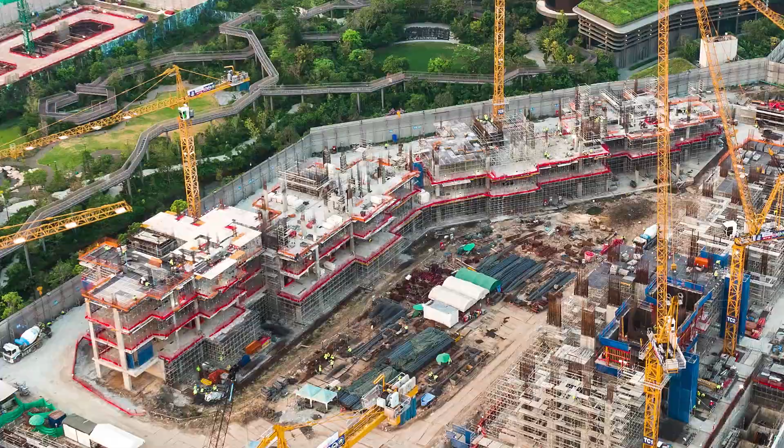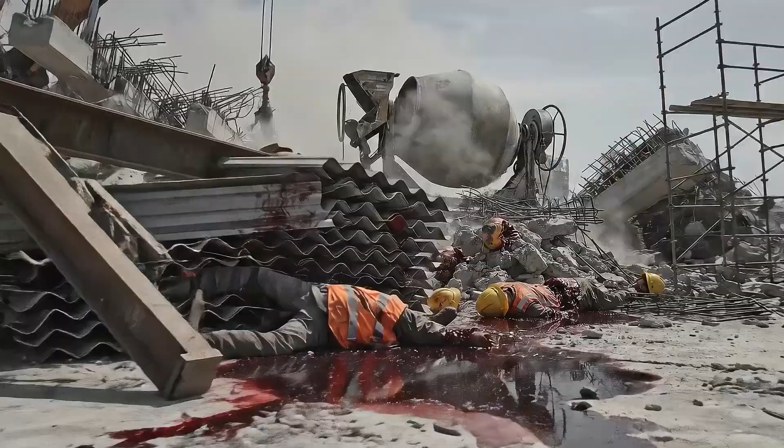Among the many hazards that occur on construction sites, collapse and burial accidents are types of incidents that can lead to massive damage in a very short span of time. During the process where various structures, such as ground, shoring, scaffolding, or formwork, suddenly give way, workers often become trapped by earth or construction materials. And if rescue operations are significantly delayed, their very lives are then gravely threatened.

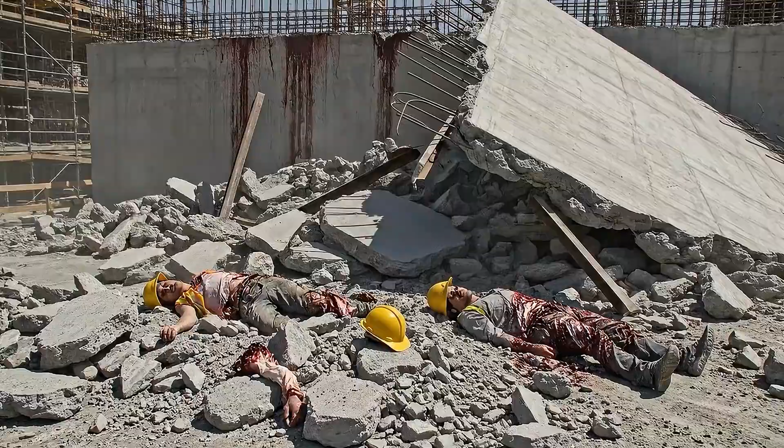Due to these characteristics, collapse and burial accidents have a high mortality rate and severe after effects, so they are classified as areas that must be proactively managed on site. The learning content of this lecture is the prevention of collapse and burial accidents at construction sites. We will practically approach how accidents start from certain factors, what structural and operational risks are repeated, and how to control them on site. The learning objectives of this lecture are as follows.

First, it is to clearly understand the causes and main types of collapse and burial accidents. Secondly, it is about reaching a level where you can explain the necessary safety management procedures and emergency response plans to prevent accidents. Through this lecture, you will be able to understand collapse and burial accidents as complex disasters caused by the interaction of ground and structural work methods, rather than just simple structural damage.

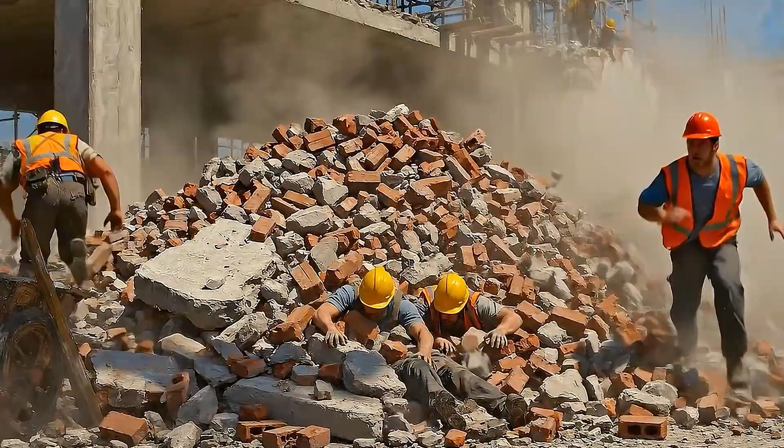Collapse and burial accidents occurring at construction sites are complex disasters, typically resulting from various risk factors acting simultaneously. First, let's examine collapse. It refers to the phenomenon where structures such as buildings, retaining walls, scaffolding, or even the ground itself are unable to withstand their own weight or maintain their structural integrity due to external forces, ultimately leading to their complete collapse. Here, external forces refer to not only natural factors like heavy rain or earthquakes, but also vehicle vibrations, heavy equipment loads such as excavators or cranes, and excavation work at adjacent sites.

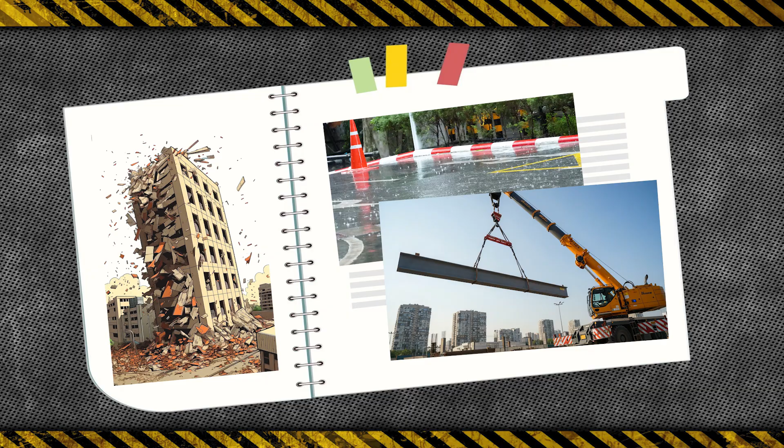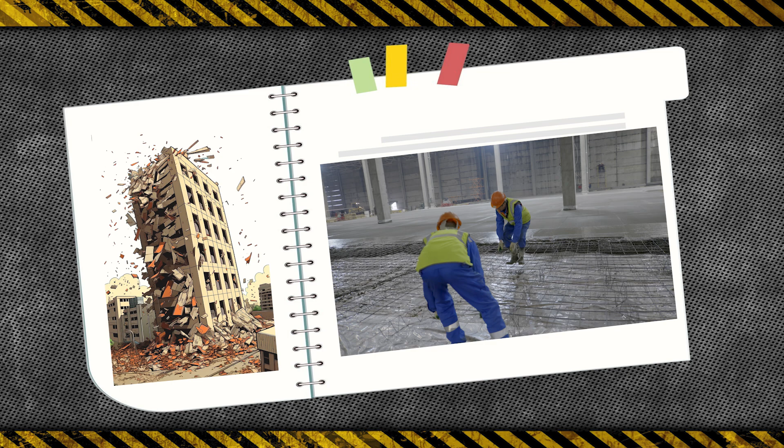Poor construction is a major cause, as structures can easily collapse if they lack strength, or if connections and supports are improperly installed during the building process. Such collapses don't only occur during construction, they can also happen long after completion due to ground shifts or additional loads. Entrapment refers to a situation where workers or equipment are covered by soil or structures due to a collapse.

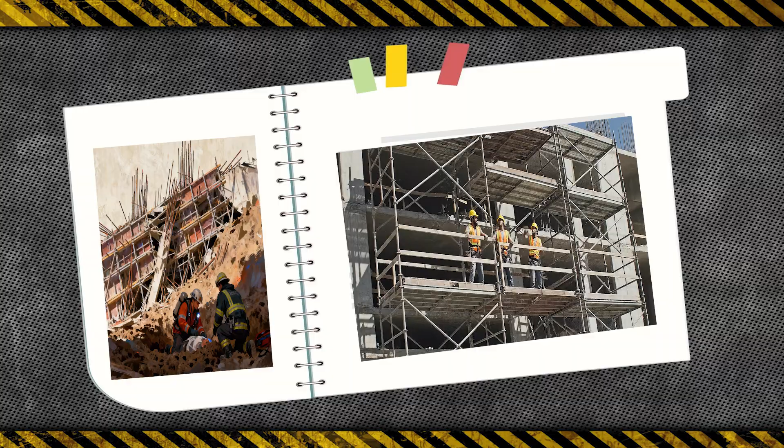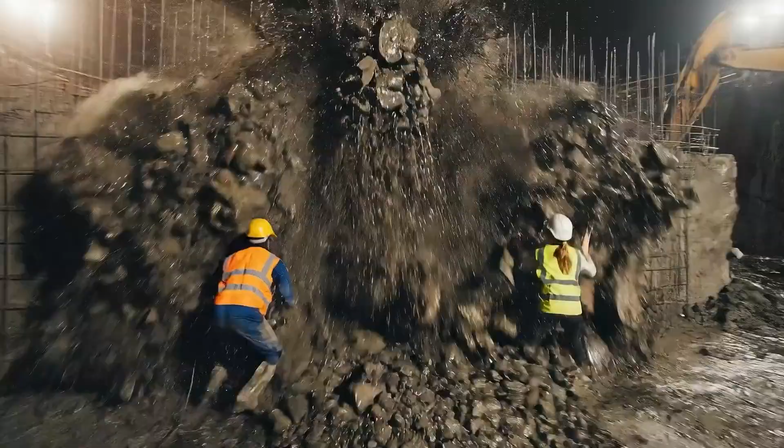Typical examples include workers being buried under a pile of soil as the ground collapses, or workers on a lower floor being crushed by structures as scaffolding collapses. Especially during excavation, tunnel construction, or underground structural work, if the earth-retaining structure weakens even slightly, soil can instantly pour out, leading to a high risk of accidents.

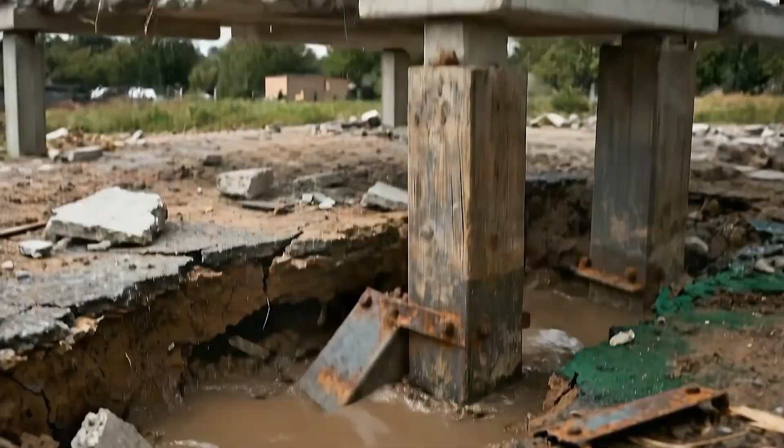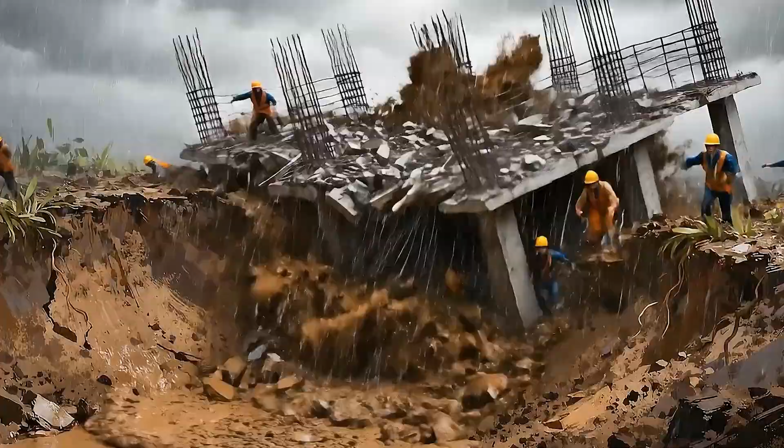The causes of such accidents are relatively clear. If excavation proceeds when the ground is weak, or if there are buried objects within the ground preventing sufficient support, the risk of collapse significantly increases. When groundwater seeps in due to improper drainage, or when soil moisture increases during heavy rain, the ground becomes heavy and loses its supporting strength.

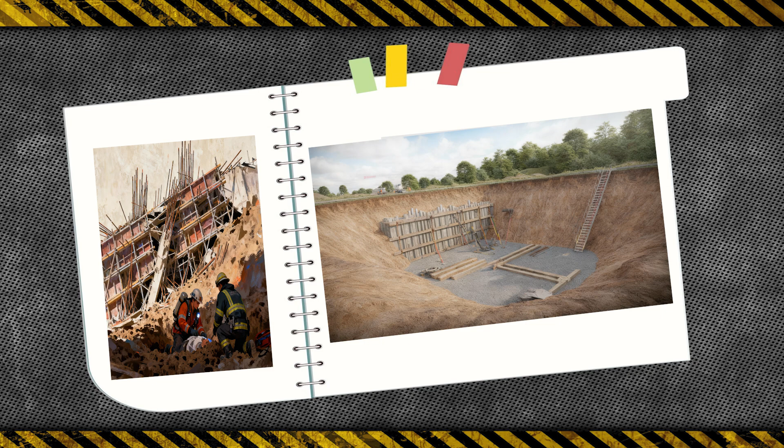Another major cause is when retaining walls, shoring, or supports do not meet design standards or are poorly installed. Improper excavation, like digging wider than planned or undermining, destabilizes the ground, easily leading to collapse. If management procedures such as risk assessment, TBMs, or site inspections are missed, the likelihood of an accident increases further.

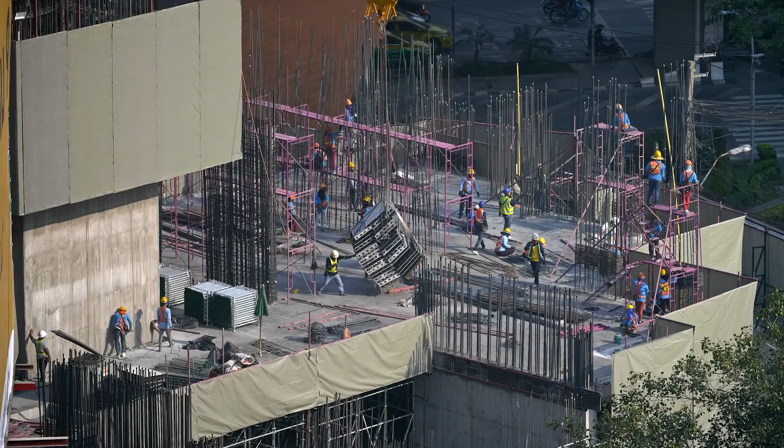Construction sites are structurally fast-changing and unpredictable environments. Especially in confined spaces or deep excavation sections, changes in the ground must be meticulously tracked, and instability significantly increases when external factors, such as the load of adjacent structures or groundwater flow, act simultaneously. There are many cases where manpower and equipment are simultaneously deployed here, increasing the risk of initial collapse leading to secondary accidents.

According to statistics from the Ministry of Employment and Labor, collapses and burials account for about 20% of fatal accidents in the construction industry, indicating a significant proportion. Many cases have seen the Serious Accidents Punishment Act applied. When these accidents occur, both fatality rates and injury severity are high, making this a disaster type that must be prioritized and managed on-site.

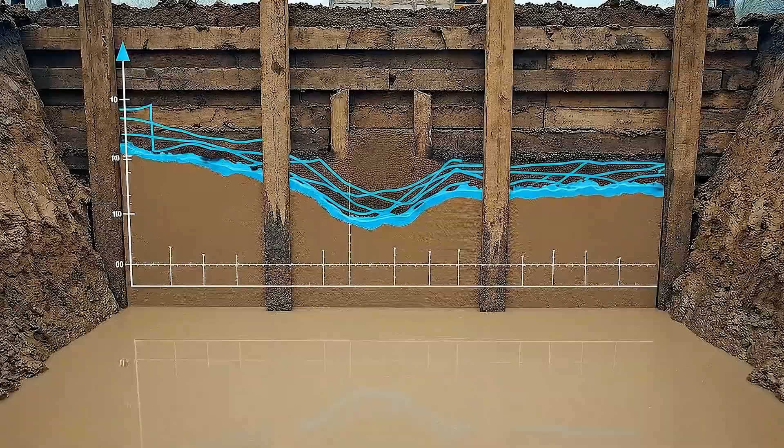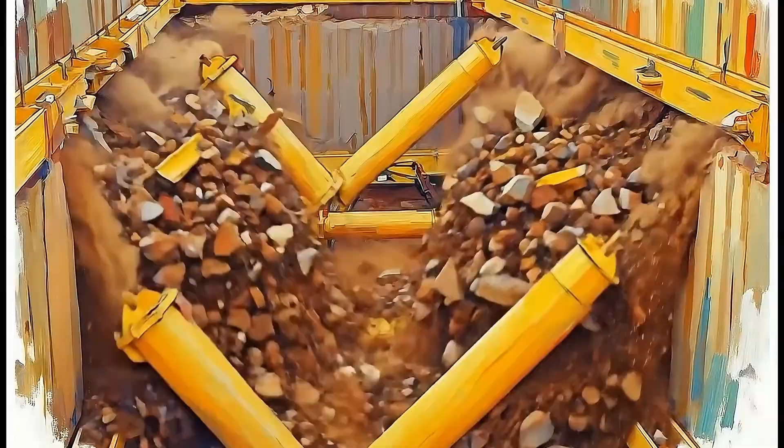Collapse and burial accidents usually happen when the ground or temporary support structures cannot withstand the forces they are meant to bear. If the ground is weak or groundwater flows in, the soil may not be able to maintain its shape on its own and can collapse rapidly. Additionally, if the retaining wall or support structures are not installed according to design standards or are not properly inspected after installation, the excavation face can easily collapse.

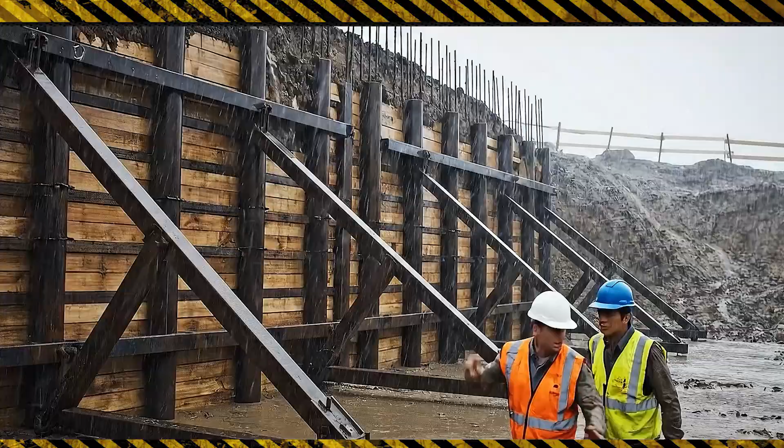During periods when soil moisture rapidly increases, such as heavy rainfall or thawing seasons, the ground suddenly weakens, increasing the risk of accidents. And at sites where basic safety management, such as risk assessment or toolbox meetings, is not implemented, even small signs can lead to collapse due to inadequate response. The load of adjacent structures, repeated loads from heavy equipment like excavators or cranes, and external forces such as earthquakes or vibrations can push earth pressure past its limit, causing structures to collapse.

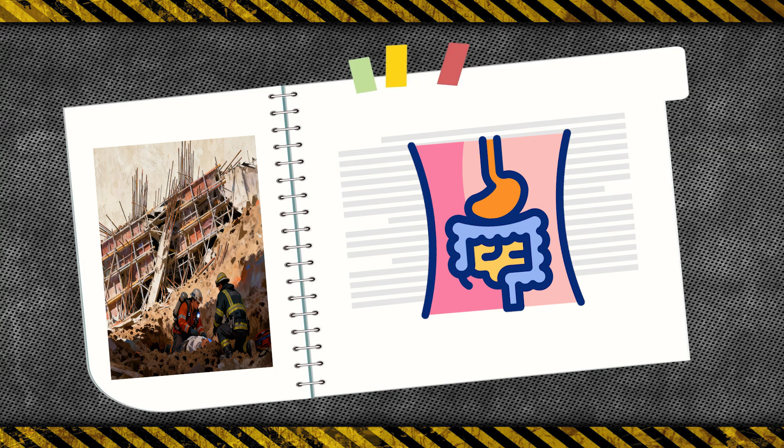When such collapse and burial accidents occur, the physical harm suffered by workers is extremely fatal. In a situation where the whole body is pressed by earth and sand, a pressure close to 1.5 tons instantly compresses the chest and abdomen, causing the organs to be crushed and ribs to break in succession, making it difficult to breathe immediately as the lungs cannot expand. Often, the internal organs are pushed or squeezed to one side, leading to loss of consciousness and collapsing on the spot.

Arms or legs are often hit by soil and concrete fragments, bending abnormally, and frequently suffer comminuted fractures where bones shatter. In these situations, muscles, blood vessels, and nerves are simultaneously severed, leading to immediate bleeding. If emergency response is delayed, it becomes a life-threatening condition.

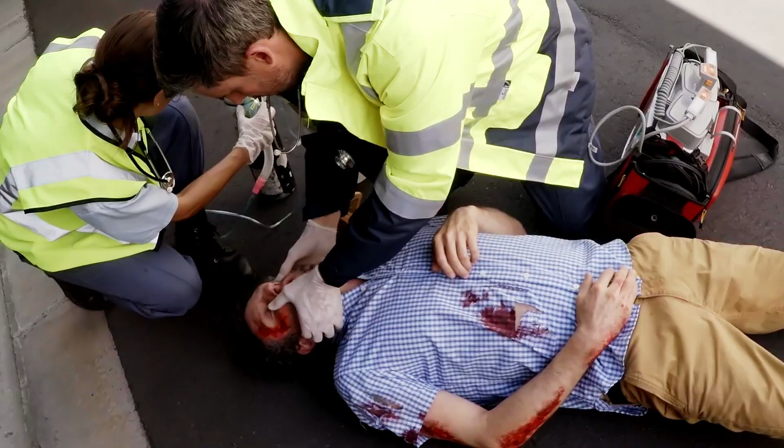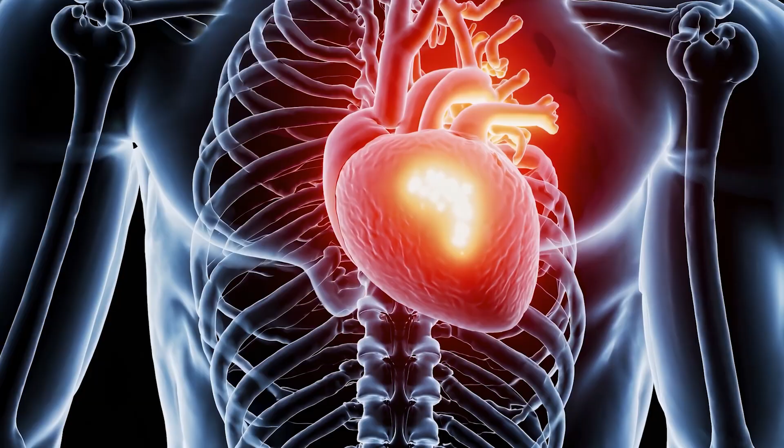Compression asphyxia, where the chest is compressed and the lungs cannot function, is also a very common injury. Within seconds, one may experience shortness of breath and chest pain, and if breathing stops, the heart can immediately cease to function. Even if only the lower body is buried, severe issues can arise.

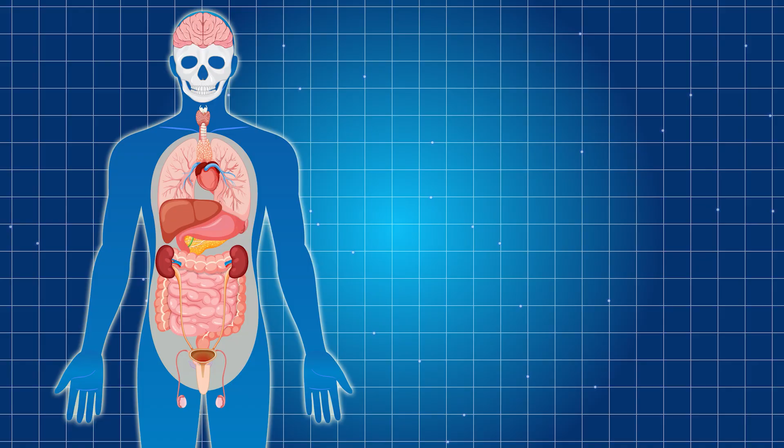If compression is prolonged, blood flow is blocked, and toxic substances rapidly accumulate in the tissues. After rescue, when the compression is released, these substances enter the bloodstream all at once, causing acute kidney failure. Even if they appear conscious, it's a very dangerous state where organ damage has already progressed.

When falling objects and soil pressure act together, the head and neck suffer fatal damage. Skull fractures or brain hemorrhages occur instantly, and if the cervical spine is damaged, the nervous system is instantly paralyzed. Breathing becomes impossible. Within confined or buried spaces, physiological changes manifest with alarming speed.

As oxygen levels become critically low, individuals may experience severe headaches, confusion, and even seizures. Furthermore, inhaling soil and debris can obstruct the respiratory passages, potentially leading to additional and fatal asphyxiation. The body's core temperature also plummets rapidly, very often resulting in life-threatening hypothermic shock. The longer the rescue is delayed, the lower the chances of survival.

If rescued within 5 minutes of being buried, the chances of survival are high. But after 15 minutes, severe hypoxia begins. And after 30 minutes, the mortality rate increases sharply. Because surviving for over an hour is very rare, in collapse and burial accidents, the speed of initial response is paramount.

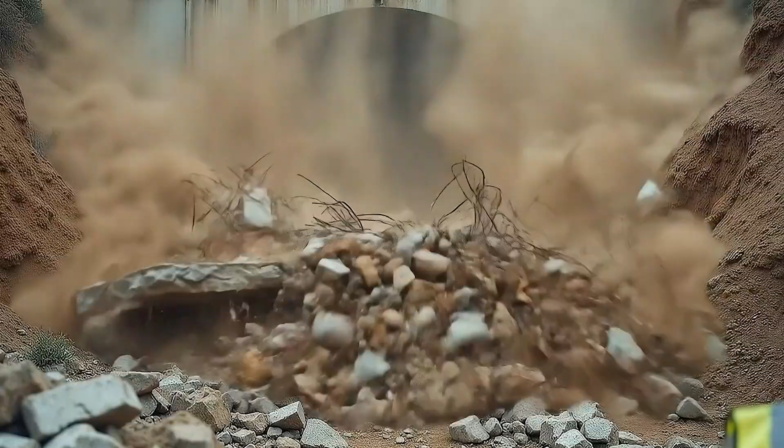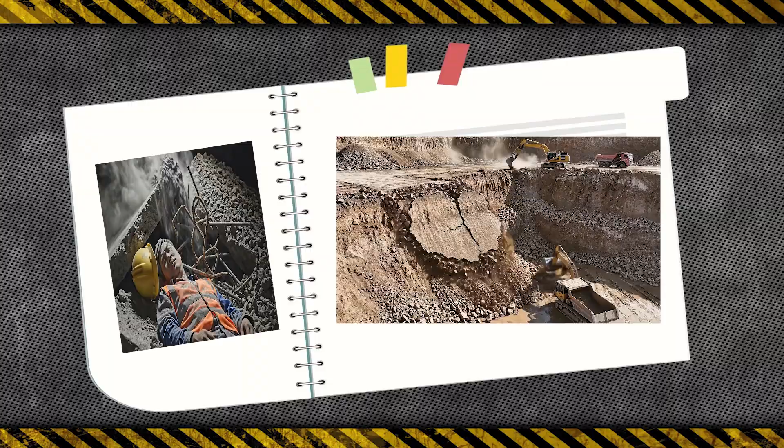This time, we will continue to look at actual collapse and burial accident cases that occurred at construction sites. This is because only by specifically understanding what situations are repeated on site can preventive measures be accurately applied. The first case is a soil collapse accident that occurred during excavation work.

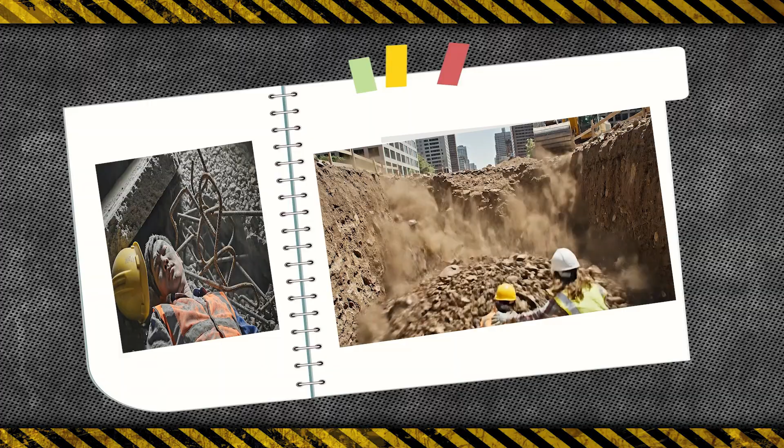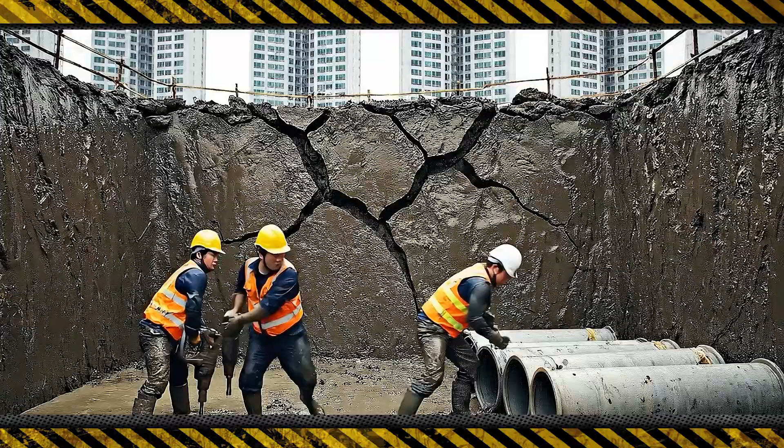In the middle of a city, while excavating to a depth of about 4 meters, the sidewall soil collapsed, quickly burying 2 workers. Excavation at this site proceeded without conducting a ground survey, and necessary earth retention or support structures were not installed for excavations exceeding 2 meters. Drainage facilities were not adequately set up, so after heavy rains, the ground was saturated and the safe slope of the excavation surface was insufficient.

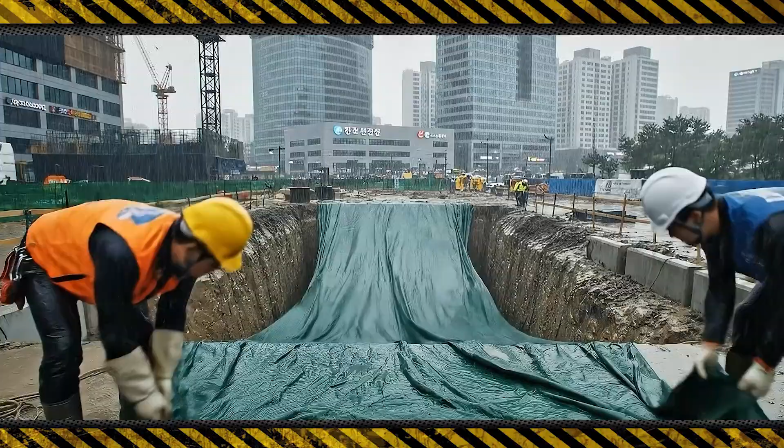Risk assessment and drilling investigations were omitted before excavation, and with no on-site supervision, immediate action was impossible. This accident could have been entirely prevented if the ground conditions had been surveyed and support structure plans and drainage measures prepared before excavation. If there are just procedures like stopping work when there is a rain forecast, covering the excavation face with a waterproof sheet, and sharing the risks through TBM the day before the work starts, the possibility of an accident is greatly reduced.

Next, the second case is a collapse in an underpass after heavy rains. Immediately after the monsoon, a retaining wall in the underpass tunnel section overturned, and the earth support collapsed, damaging nearby structures and burying equipment. At the time of the accident, the drain was blocked, so rainwater kept entering behind the earth retention wall. Soil pressure rapidly increased, and the structure couldn't withstand it.

Despite this, drainage inspections were not carried out, and necessary safety procedures during construction were repeatedly omitted. Drainage facility management was inadequate, and emergency measures for weather forecasts were not prepared. There was no procedure to check ground stability after rainfall. For prevention, it's essential to inspect drains and sumps before and after heavy rainfall and remove debris.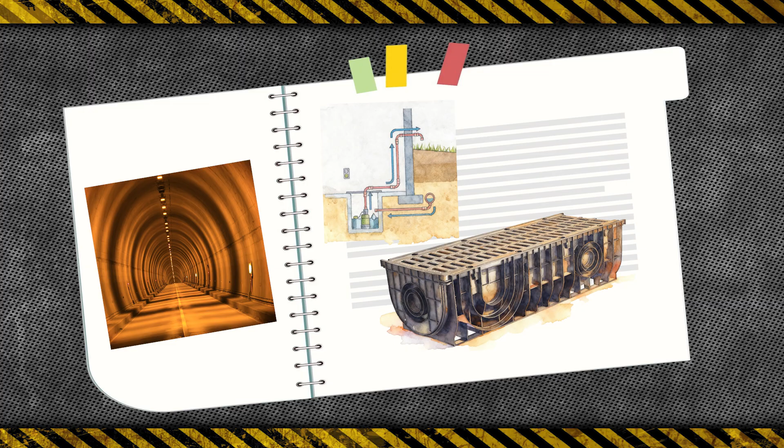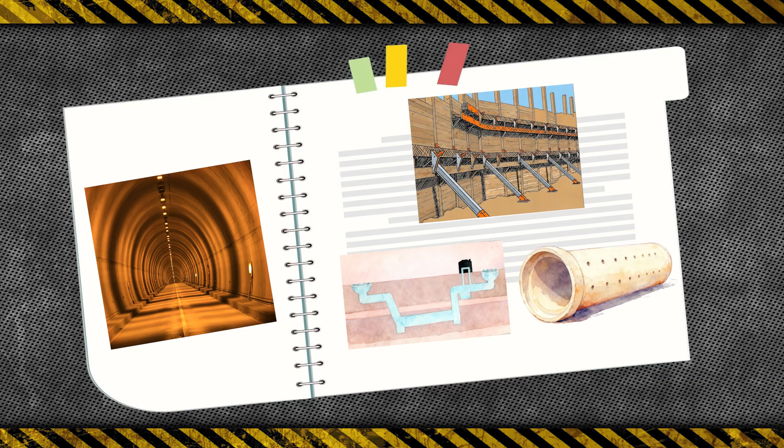Additionally, measures are needed to install drainage layers and perforated pipes behind retaining walls to disperse water flow. After rainfall, ground stability must be re-evaluated and the need for further reinforcement assessed. Also, we must operate a system that checks weather information in real time and can immediately stop work if danger is detected.

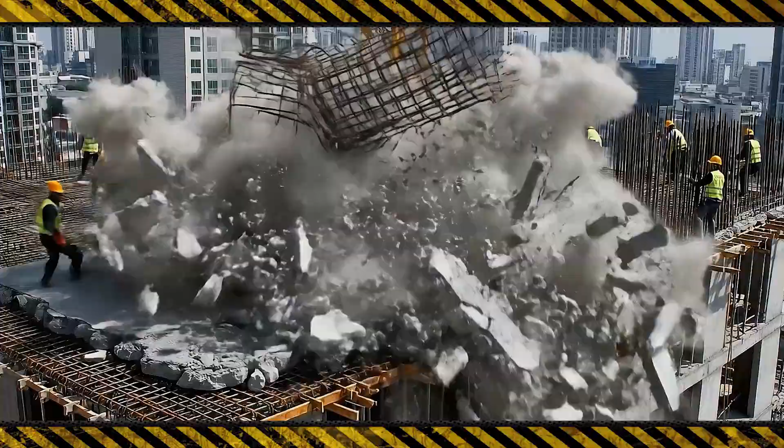These two examples clearly show the key areas where collapse and burial accidents repeatedly occur, such as excavation, drainage management, and earth retention structures. This can be seen as a prime example that demonstrates the consequences when safety management procedures are omitted or inspections are inadequate. To prevent collapse and burial accidents, it is most important for supervisors and workers to accurately understand and perform their respective roles.

First, we'll take a look at the responsibilities of the supervisor. The supervisor must check and record the safety checklist every day before starting work and ensure that actual risk factors are properly reflected in the work plan. It's crucial to verify if reinforcement measures were properly implemented based on the risk assessment. Ground conditions, drainage, and temporary support installation must all be checked through visual inspection and measurement.

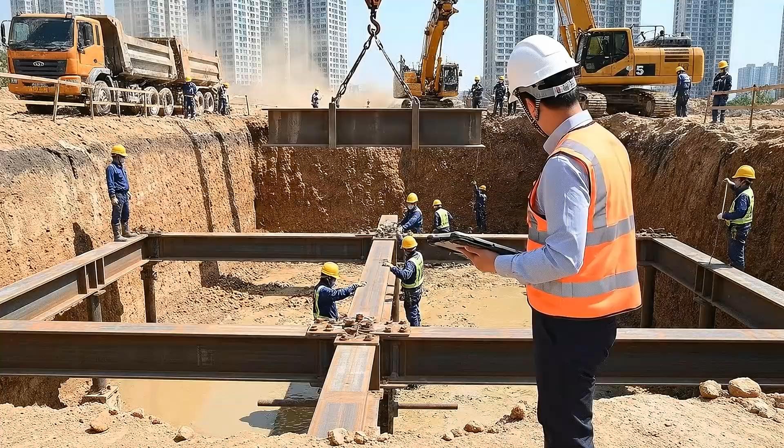Given that supervisors also possess the authority to halt or resume operations based on changing weather, an emergency inspection plan must be established beforehand when heavy rain or strong winds are predicted. You must personally oversee the installation, dismantling, or reinforcement of ground support, ensuring the construction sequence is followed. You also need to lead the TBM meeting and accurately share daily risks with workers.

You must also check the workers' PPE use and if access control lines are maintained. If danger is detected, you are responsible for immediately stopping work and guiding on-site evacuation. Inspection results must be reported to managers and clients, and records must be kept. The role of workers is also very important.

Prior to work, you must fully wear all personal protective equipment, including helmets, safety shoes, and belts. You must never enter areas other than designated entrances and safety passages. If there are signs of collapse, such as cracks, subsidence, soil flow, or tilting walls on site, it must be reported immediately. Access to areas without support structures or designated as danger zones should be prohibited.

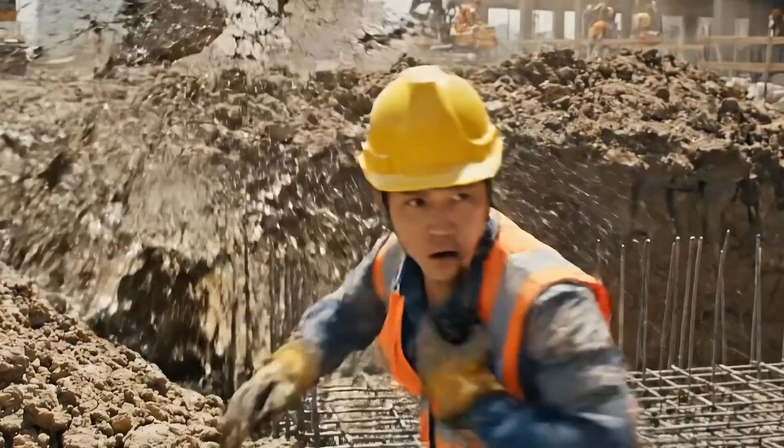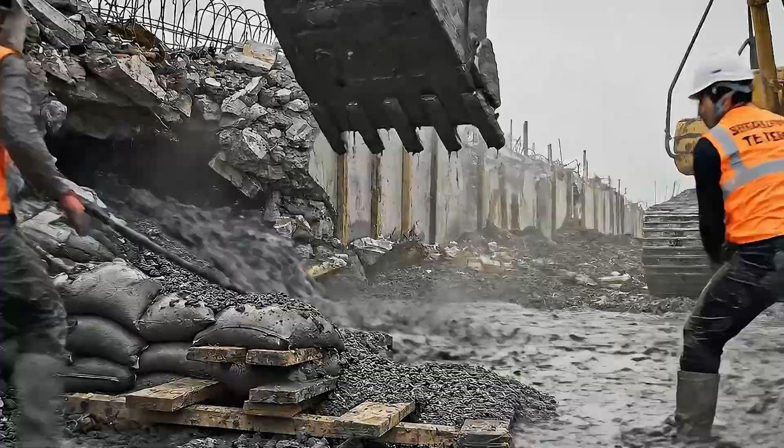If you notice unusual sounds, vibrations, or muddy water inflow during work, stop work immediately and report it. Strictly adhere to the work procedures and safety regulations shared by TBM. And on days with rain or strong winds, you must not proceed with work without a supervisor's instruction. In areas with moving equipment, you must stay behind exclusion zones and follow the signalman's instructions.

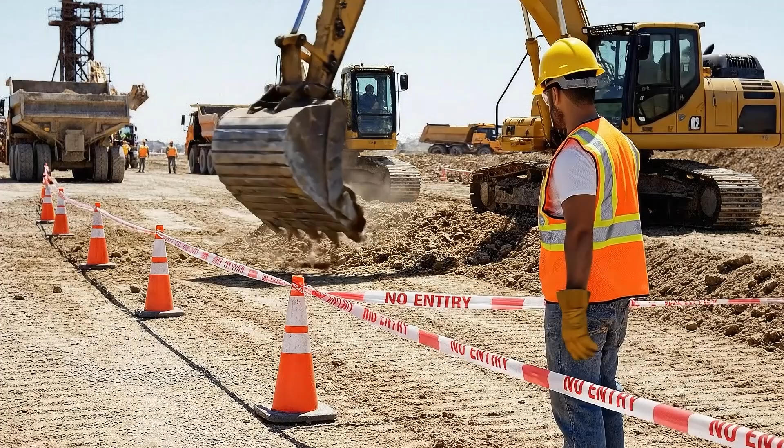Also, if you spot dangerous actions by colleagues, you must warn each other and immediately report them to management. A cooperative system is essential. The more diligently supervisors and workers perform their respective duties, the faster on-site risks diminish. Collapse and entrapment accidents have very brief warning signs and extremely limited response time. Therefore, consistent role fulfillment is crucial for accident prevention.

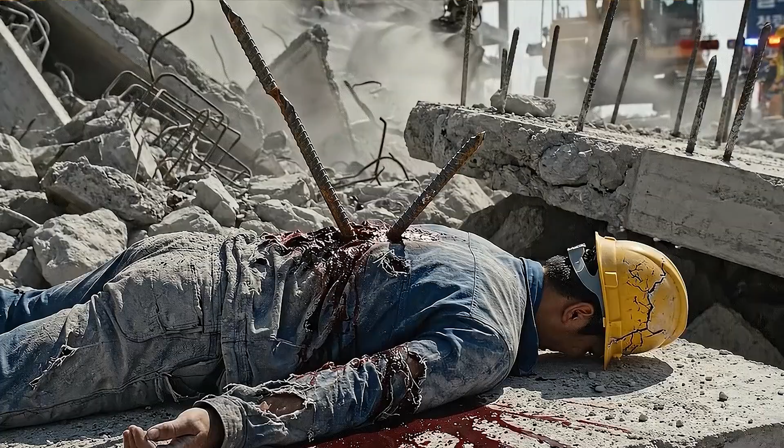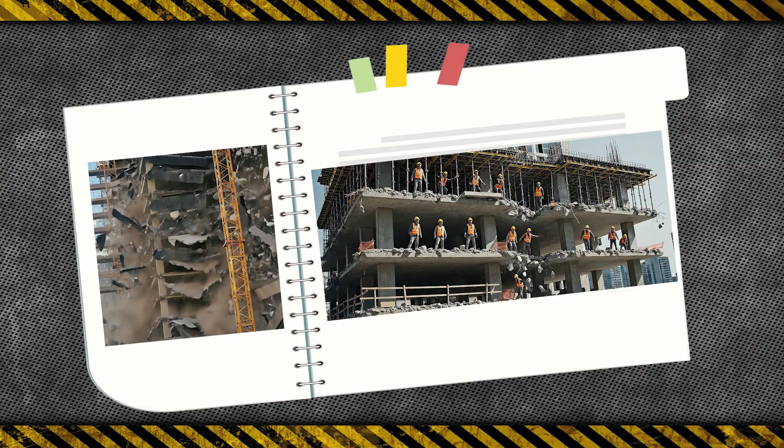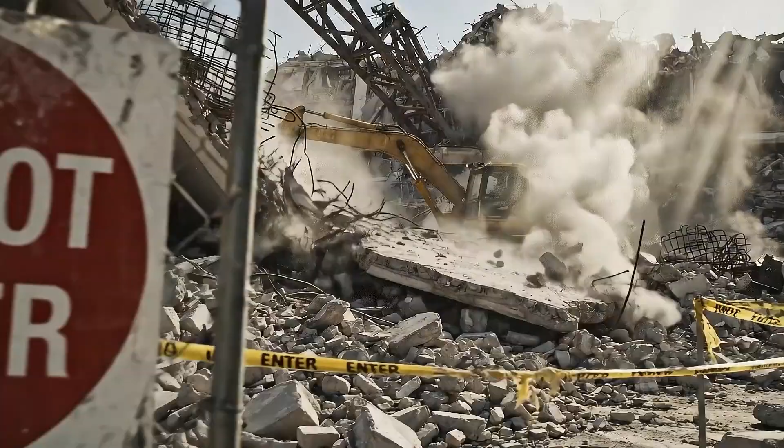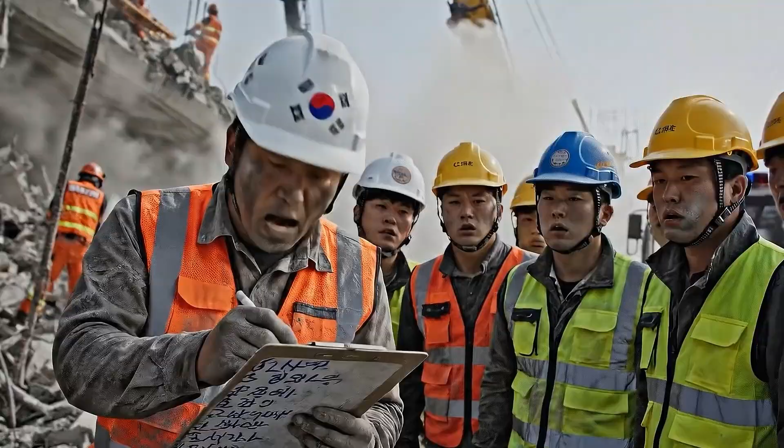When a collapse or entrapment accident occurs, the speed of the initial response significantly impacts the survival rate. Therefore, the sequence of actions immediately after an accident is crucial. First, the moment an accident occurs, immediately stop all work and equipment operation. As further collapses may occur, control access to dangerous areas, evacuate all personnel, then quickly identify everyone's location through a head count. These situations shouldn't be handled alone. Immediately report it to a manager or safety officer, letting them control the site.

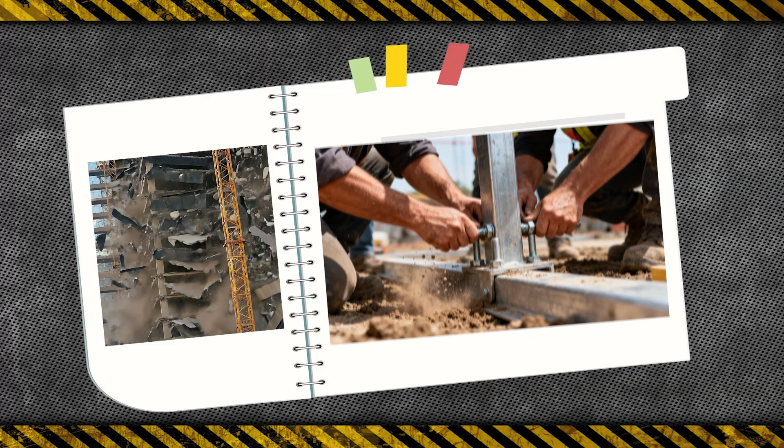During the site control phase, a perimeter must be established to restrict access, and areas with a risk of secondary collapse require temporary reinforcement. If rescue teams approach without confirming ground stability, even rescuers can be endangered, so a phased approach is essential. It's important to deploy monitors to continuously check for additional deformation or soil movement. If necessary, shoring reinforcement or drainage measures must be implemented first. Then construction can proceed safely.

In the rescue phase, the buried person's exact location must be found. Once confirmed, immediately call for rescue and provide protection. Reinforce the area to prevent more soil from entering. After extracting the victim, provide immediate first aid and transport them to a hospital, coordinating with 119.

Reporting and site preservation are also crucial procedures. Upon an accident, immediately report to authorities and preserve the scene as much as possible. Document with photos and videos and prohibit moving equipment that could obscure the accident's cause. The situation at the time and response times must also be accurately recorded.

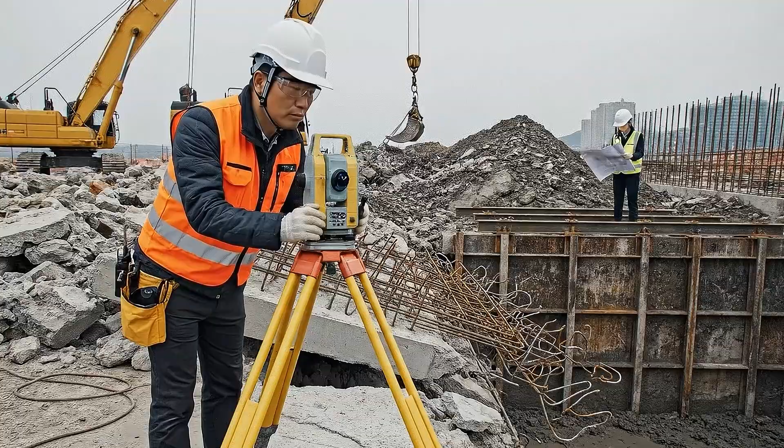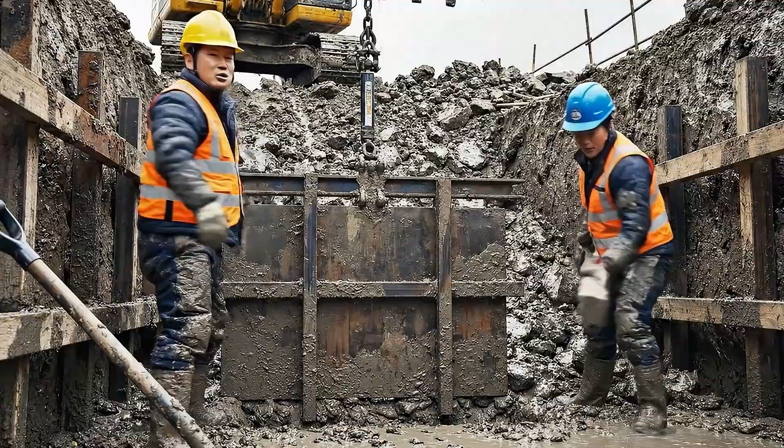After the accident, measures are necessary to prevent secondary incidents. After the rescue, re-inspect the ground and shoring, and immediately reinforce any remaining risky areas. Analyzing the cause of the accident and preparing measures to prevent recurrence is essential. Additionally, conducting worker training again and supplementing the emergency manual are necessary to prevent the same accidents from happening again on site.

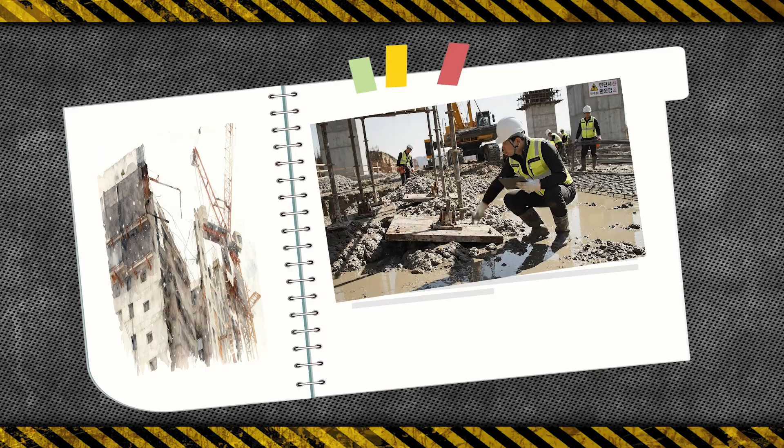In this lecture, we looked at the causes and prevention methods of the most fatal accidents on construction sites, collapses and burial incidents. You've surely seen through numerous examples how seemingly minor issues like ground instability, inadequate drainage, or faulty shoring installation can ultimately escalate into major accidents. Because collapse and burial incidents cause extensive damage once they occur, pre-inspection and strict adherence to basic procedures are absolutely paramount.

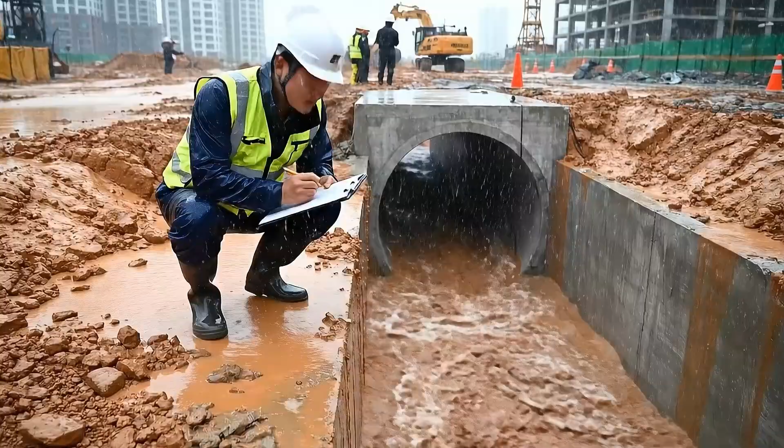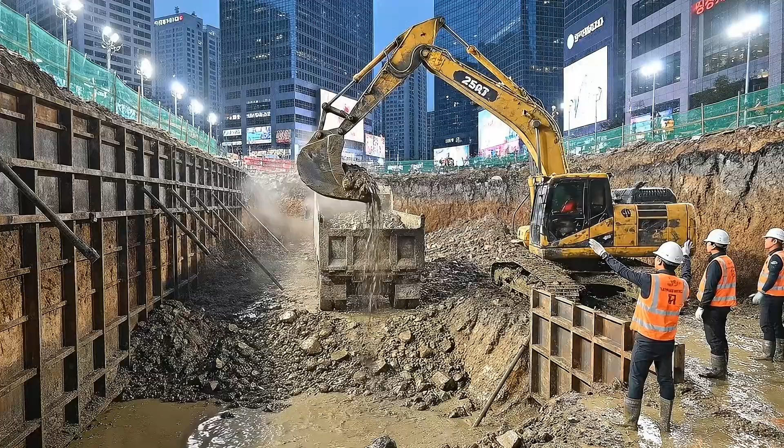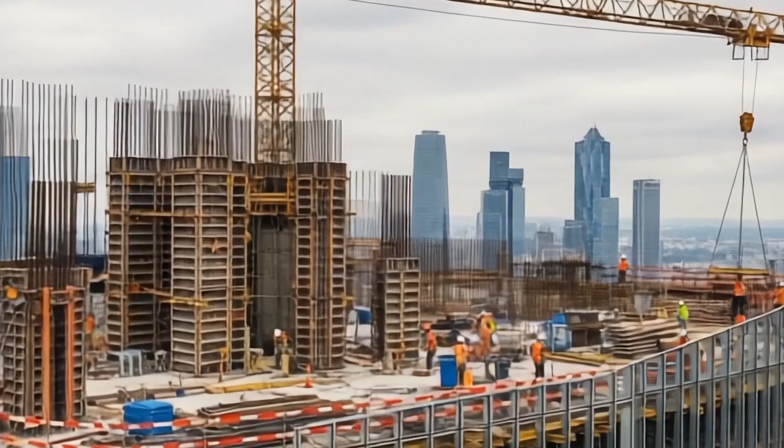Before starting work, check the ground conditions and drainage situation, and if any signs of danger are seen, report them immediately and stop the work. This simple fundamental is the most powerful safety measure for protecting lives. When both supervisors and workers diligently fulfill their roles, site safety levels improve. I hope the topics we discussed today will be naturally put into practice in your actual work, becoming part of your daily routine. Your small efforts can sufficiently prevent collapse accidents at the site.